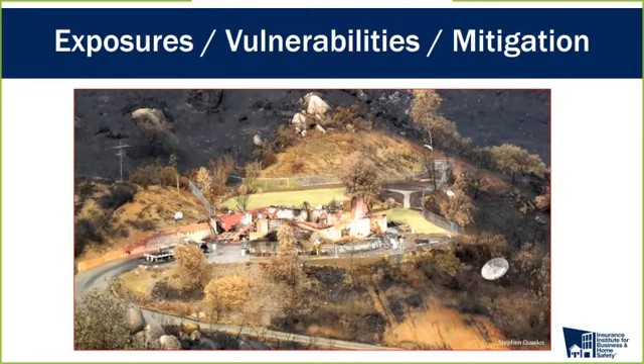Up until recently, our lab being one example, and other researchers, for example NIST, information for the built environment has been a little bit lacking. There's been a lot of information about defensible space and vegetation, not as much about the building. I think that's changing with an increased research effort in this area.

I'd like to spend a second talking about IBHS. For those of you that don't know, it is a member-based organization funded by the insurance industry. Our objective is to conduct scientific research to identify vulnerabilities and evaluate mitigation strategies for these vulnerabilities. We focus on natural hazards that have a wind component, so wind-driven rain, hail, and wildfire because of the ember exposure. Once we find things that work, we try to get them implemented in codes and standards, and we also have a pretty active communication effort to get this information to homeowners and others that can benefit from what we find out.

Most of our wildfire research is conducted at the IBHS Research Center in Richburg, South Carolina, about an hour south of Charlotte, North Carolina. As you can see, it's a large chamber, a wind tunnel facility. We can put full-size buildings in and subject them to wind-related events. We have some small lab capabilities for many of the hazards we investigate, but for wildfire, mostly we use this chamber. This is the inside of the chamber. In the left-hand picture you can see the array of fans. There are 105 fans that can blow winds of up to 130 miles per hour, roughly 58 meters per second. Each fan is roughly 1.7 meters in diameter.

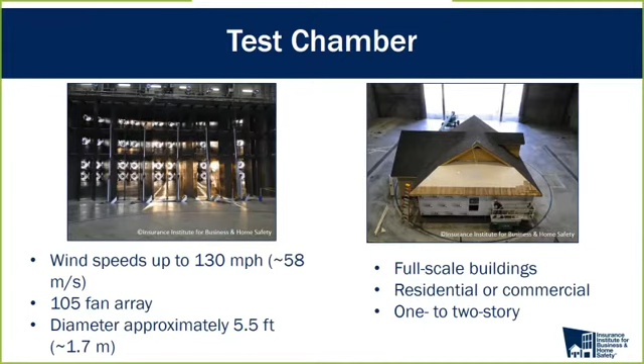So that's what those vertical steel ducts are. The right-hand side picture, you can see a building on a turntable. This turntable allows us to turn the building to evaluate the impact or effect of wind direction on whatever we happen to be investigating. It's a useful capability just because of what wind does around the building. We can put full-size buildings, residential, some small commercial, 1 or 2 stories. So that's our facility in a nutshell.

I wanted to move on and talk about wildfire exposures. Research and post-fire investigations have shown that ember ignitions are the major cause of building ignitions during wildland fires. It isn't the wildland fire flame front that actually results in ignition of buildings, it's ember-related things, what embers can do directly and indirectly, and I'll talk more about that in a second.

The left-hand picture is a good example of the importance of the ember. You see a burning building, this is from the Angora fire, Lake Tahoe area in 2007, California. You see a lot of green vegetation around this burning building, so the fire didn't burn to the building. Embers blew over the green vegetation, ignited some vulnerable part of the home, and ultimately resulted in the complete loss of the home.

The right-hand picture is the second generation ember generators working. This was during a vent study evaluating the effectiveness of vents, or the vulnerability of vents to ember entry. I think it's an impressive display of how these generators work. The burner part of the generator would be underneath those vertical ducts, in a 6 foot or so deep trench. So that's just an example of how we conduct some experiments.

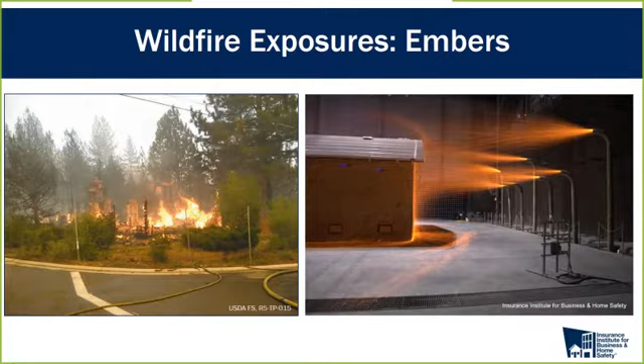So this is direct versus indirect. Direct ignition is when embers directly ignite a combustible material. On the left-hand picture, embers accumulating at the base of this combustible wood shingle wall ignited just from the ember accumulation, igniting directly.

Indirect examples are on the right-hand picture. Debris in the gutter, embers ignite the debris, and then that flame from the burning debris impinges on the edge of the roof. Similarly, on the ground where we have bark mulch, embers ignite the bark mulch, and you have a flaming exposure to the side of the building, whether it be the siding itself or the windows, as you see there's a window in this picture. So that's an example of indirect.

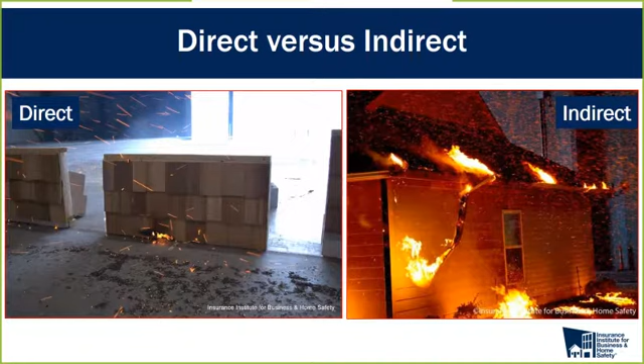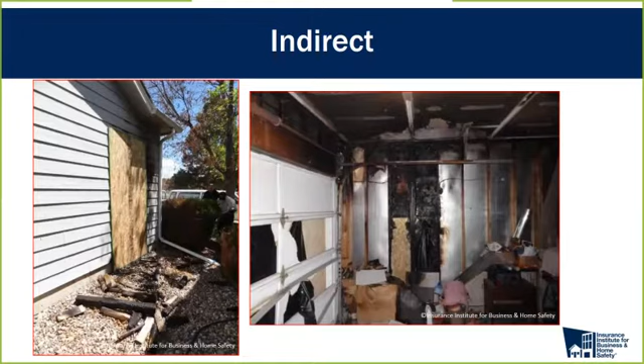Here's another example of indirect. This is rock mulch at the base of this particular wall, from the Waldo Canyon fire, 2012 in Colorado Springs. This rock mulch is a good detail, we think, but the homeowner had put a wood pile on top of the rock mulch. Embers ignited the wood pile, creating a flaming exposure to the siding, and you can see on the left-hand picture the kicked-away wood pile, likely by firefighters that showed up, and the inside of the garage showing damage in this case. So this house was only damaged. Had no one shown up, it would have likely been a different story.

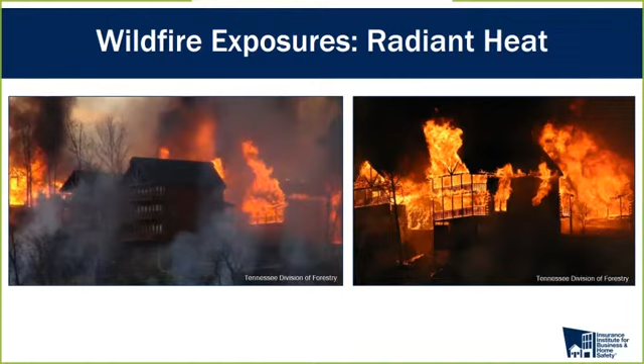So the other two exposures are radiant heat and flame contact. You'll notice that indirect often results in radiant heat and/or direct flame impingement exposure. This radiant heat example is from a fire in eastern Tennessee, not the recent Gatlinburg fire but the one before in the same county. Extended radiant heat from one burning building ignites another without direct flame contact. There was a window in the upper part of the left-hand picture where you see flames coming out. It's possible the glass was broken, but it was a big overhang, so it could have been ignition from heat trapping up in that area of the wood components of the building. The right-hand picture is just several minutes later - the same building that's just starting in the left-hand picture became fully involved and burned to the ground relatively quickly. It took about 15 minutes to go from the left-hand picture to the right-hand picture.

And then direct flame contact - in this case, fire burning up this draw reached the home you see burning. It was direct flame contact from this particular fire burning up the draw and impinging on the bottom of the wall of this home, then burning up and involving the decks, as you see here.

So the three major exposures are: ember, radiant heat, and direct flame contact. Indirect ember exposure results in radiant heat and/or direct flame contact.

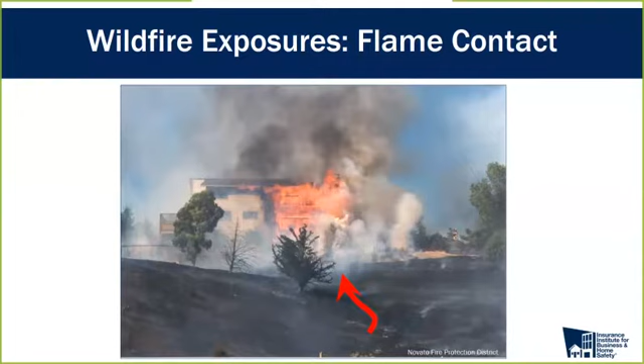So those are the typical Ember exposures from wildland fire, and then you have these other mechanisms that result in ignition of a home from the Ember.

So ultimately, when we have a lot of home losses in a wildfire, you get to a point where you have a number of home-to-home fire spread scenarios.

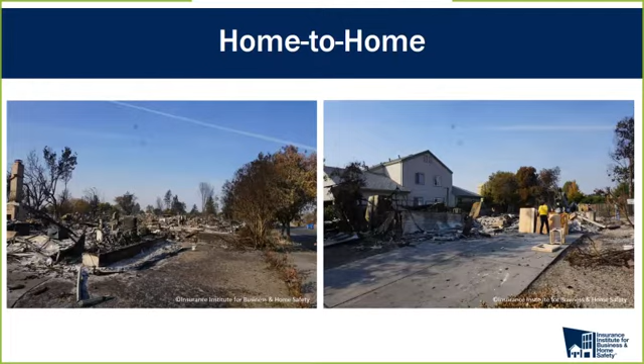The idea here is that no matter what the homeowner may do on the property, that home still has to resist an Ember exposure, because the homeowner or business owner really doesn't have enough control over enough space to bring the Ember exposure to a given building to zero. So that home always has to be able to resist an Ember exposure.

But with good defensible space, they can minimize the opportunity for direct flame contact or extended radiant heat exposure to the house, through selection, maintenance, and location of vegetation and other combustible materials like a wood pile or a tool shed. So it's a coupled approach, and we think that's the best way to minimize the opportunity for a home to ignite during a wildfire.

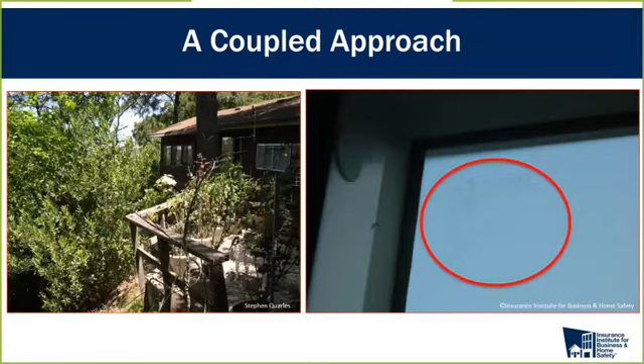As an organization, we are really interested in both new construction and existing construction. Most of us already live someplace, so the things we find out really need to be applicable to existing buildings. Building codes typically only address new construction, so we need a way to encourage homeowners to make changes to their house to make those existing buildings more resistant to wildfire. So we try to provide information on both ends.

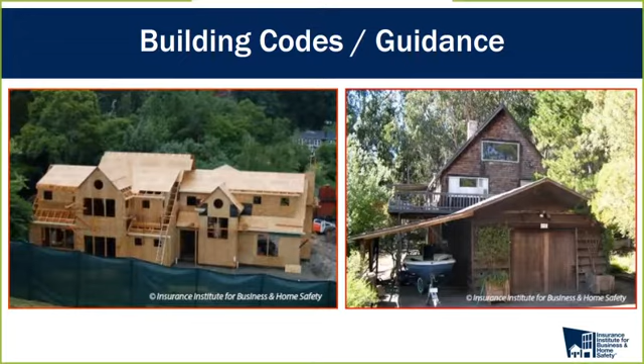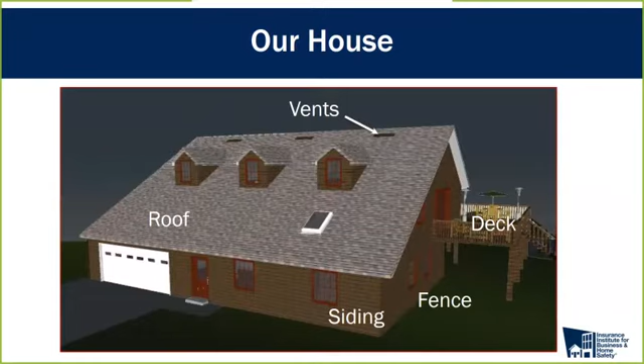We're going to walk through the vulnerability of buildings by talking about it by components: roof, siding, fence, deck, vents. These are sort of the main components. Before we do that, I'm just going to spend a second on defensible space, in particular this zone 1.

I think defensible space is sometimes called other things, but it really just applies to how and where you place vegetation, how you maintain it, the kind of vegetation you choose, and where you locate other combustible things. In Canada, this is referred to as priority zones, I think that's what the Fire Smart program calls it. In the United States, defensible space is a common term.

Other terms are used too. Typically you have just two zones from the house out 30 feet, or roughly 9 or 10 meters, and then from that point out to roughly 30 meters out.

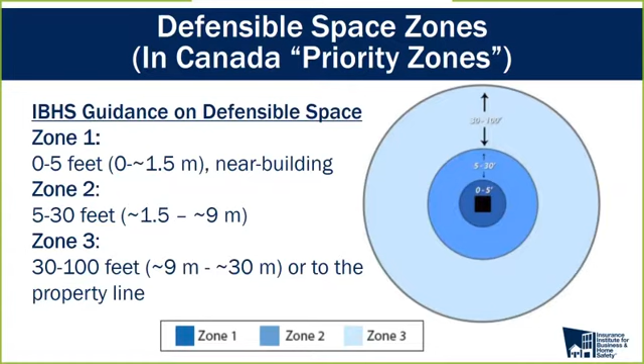What we have done, and other education organizations have done, is incorporate a separate zone really close to the building, within a meter or two of the house. We call that the non-combustible or low combustible zone. That's a really important part because it minimizes the opportunity for embers to ignite things close to the house that would definitely result in radiant heat exposure or direct flame contact to the building. So this non-combustible zone is one really critical part of this ember-resistant ignition component for a building.

The same kind of zone that would be within a meter or two of the house, you extend it to include the entire footprint of the deck. What we want to avoid under a deck is the storage of a lot of combustible materials. It's kind of hard for any deck to resist burning your own private lumber yard underneath it. It's difficult for any deck to resist that kind of exposure.

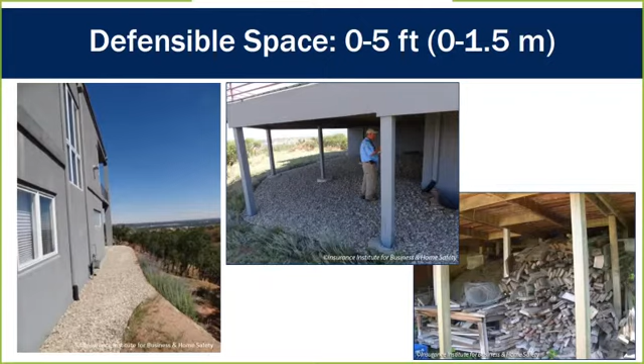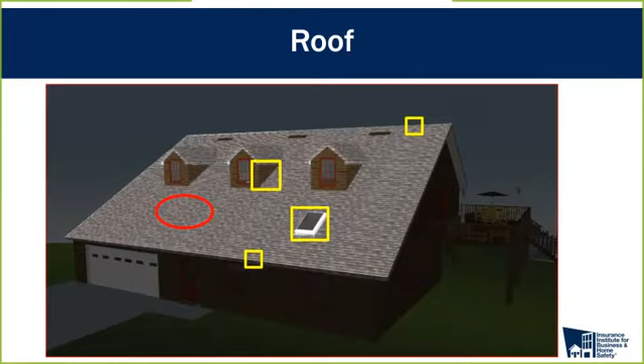There are other components to the fire rating that include flame spread and flame contact kind of exposures, and whether or not the burning roof covering generates embers or firebrands. You have to pass all of them to become a Class A, for example.

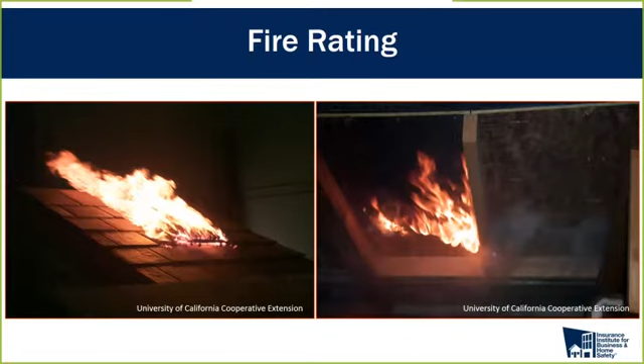This is just showing the burn through or fire resistance part. This burning brand is a three-layer construction, kind of sandwich, where small squares of wood are nailed together, and for Class A it's 12 inches by 12 inches. Anyway, so that's the field of the roof issue.

But the edge of roof issues can be more vulnerable to embers than the field of the roof. So that's why we need to really address these when talking about wildfire resistant strategies for homes and buildings.

So we see here a tile kind of roof. The left-hand picture is a flat tile, but at the hips you notice there are openings during the day-to-day life of the home. Debris can blow into this gap and accumulate underneath this non-combustible roof covering. During wildfires, embers can follow right into the same location, ignite those fine fuels, the pine needles or leaf litter that gets blown in there, and ignite the home that way.

So embers ignite leaf litter or fine fuels, which then causes flaming exposure to the roofing felt, then to the other structural components of the home. The right-hand picture shows a barrel tile roof. Similarly, you can see in the open ends on the right-hand part of that picture, birds can crawl up in there and build nests. Rodents can do the same. Debris can do the same. During wildfires, embers follow, igniting fine fuels, and then those fine fuels ignite the more structural components. So in all of these, the strategy is to block these openings.

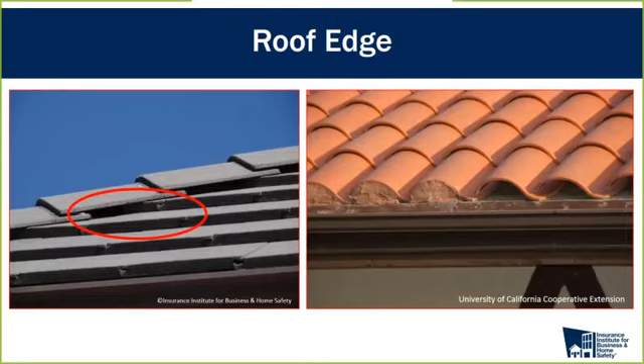But the same kind of vulnerability occurs at the hip, as you see on the left-hand picture here. These are critical things that need to be addressed to improve the resistance of a home to wildfire.

Here's another example. This is what I lump into complex roof issues, and the two pictures show a similar thing, and that is roof to wall conditions. The left-hand side is a split level house. The right-hand side just shows a dormer with siding. These are both Class A roof coverings, asphalt comp roof coverings, which are Class A.

And you see in each one there was debris on the roof. This debris will be readily ignited by an ember exposure, and the Class A roof covering can handle this kind of exposure. In this case, it would damage the roof, but it wouldn't burn through into the occupied space.

But the vulnerability for this roof is the siding. Can the siding provide the same kind of protection? The left-hand picture shows a cedar shingle siding product. I would argue likely not. So the vulnerability of the home on the left isn't the roof per se, but it's the siding that could look like a roof vulnerability.

So we need to make sure that the siding protects in these situations, that it provides comparable protection to the roof as a Class A roof does. Replacing the siding locally in this area, and being really vigilant about removing debris from the roof, are options. The most surefire one is to replace siding locally in this area.

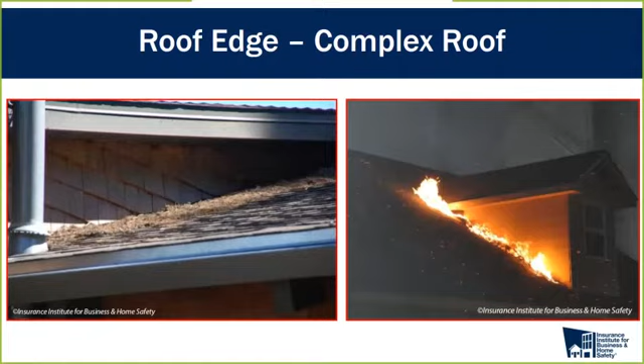So gutters, we saw this left-hand picture a little bit earlier. This is debris in the gutter ignited by embers. The left-hand part of that picture shows a vinyl gutter. That vinyl gutter will detach if the debris is ignited by embers and fall to the ground, and it will become a what's-on-the-ground problem.

The gutter on the right is a metal gutter. It'll stay put, and so it's an edge of the roof issue, but we need to make sure that edge of roof can handle that exposure. So removing debris from the gutter in a routine way is one way to minimize that occurrence. And then another way to help with this is to provide a metal drip edge at that roof edge. I'll show you a picture of that in a minute.

You also see this burning debris on the ground, and we'll talk about that a little bit more when we talk about windows.

So one option is a gutter cover device, and that tends to minimize the accumulation of debris in the gutter itself, as we see in the right-hand picture. But depending on the gutter cover device, sometimes it just forces the accumulation of material someplace else. In this case, it's on top of the gutter cover. You'll also notice, if you walk around and look, that it can also force the accumulation of debris on the roof covering.

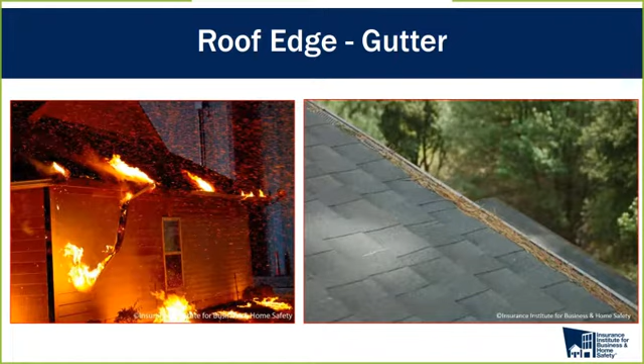So here's just a continuation of the gutter story. Let's go to the right-hand picture first. This is an integrated gutter with a drip edge, so the gutter slips in underneath the roof covering, and then there's a vertical leg down which bends around and becomes the gutter. If your gutter doesn't have this, you can buy pretty easily and inexpensively an angle flashing that you would just slip under the roof, letting that vertical leg hang down and go over top of the vertical leg of the gutter where it attaches to the fascia board.

This provides protection of the wood components, the roof sheathing and the typically wooden fascia board. So it protects that should debris ignite. An additional benefit is that it can reduce ember entry and accumulation at that joint.

The left-hand picture is from an early experiment that we did, and you can see the red circle is circling a glowing ember that is entering at the gap between the roof sheathing and the fascia board. So with that angle flashing in front of it, that ember doesn't have a way to come in.

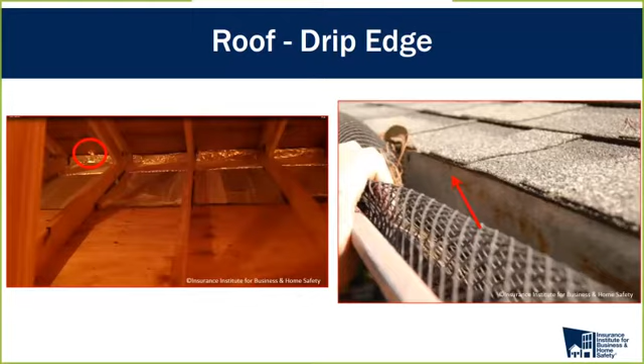Skylights used to be pretty common in California, but they're becoming less common because of energy code regulations. There's a couple kinds of materials commonly used for skylights where they do occur. The flat skylights, shown in the left-hand picture, typically are tempered glass or laminated glass, often with 2 layers to provide additional protection to the occupant. The one on the right is a plastic dome type.

Most guidance tells you to avoid the plastic dome type, but I think we need to incorporate additional information regarding the slope of the roof. These 2 pictures depict relatively flat or low slope roofs, and you'll notice debris doesn't really accumulate on the domed skylight at all - there's a little bit, but not nearly as much as on a flat one. So the flat skylight with a lot of debris accumulation would be a flame impingement risk to the glass, and whether the glass can resist that is really a function of the type of glass.

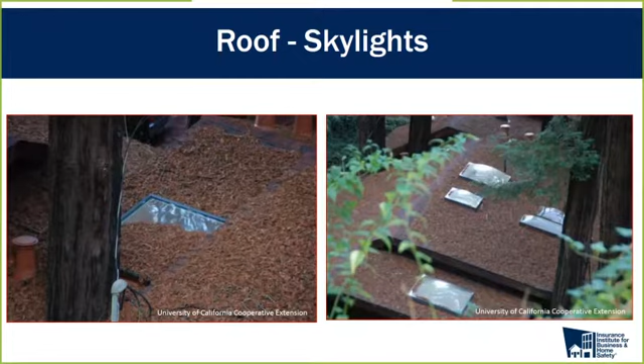So removing debris from the roof is a good idea, but for flat roofs, since they all have metal flashing surrounding the skylight to roof intersection, you can argue that domed is better for flat roofs. But the steeper the roof, the more it acts like a wall, and then you really need to consider what that wall is seeing in terms of vegetation outboard. You want to minimize the opportunity for extended radiant heat for that wall to see. So make sure your vegetation management is good in areas where you have a steeper roof.

So let's talk a little bit about vents now. There's a number of vents that can be on your home if you have a vented attic space. Typically you'll have one set of vents in the under-eave area - these are nominally inlet vents - and other vents on the roof or at the gable end that would be nominally outlet vents. If you're built on a crawl space, you'll also have foundation or crawl space vents. There are also vents on the vertical wall for rooms with combustion air equipment like a hot water heater or furnace, which need makeup air, so those are typically screened openings.

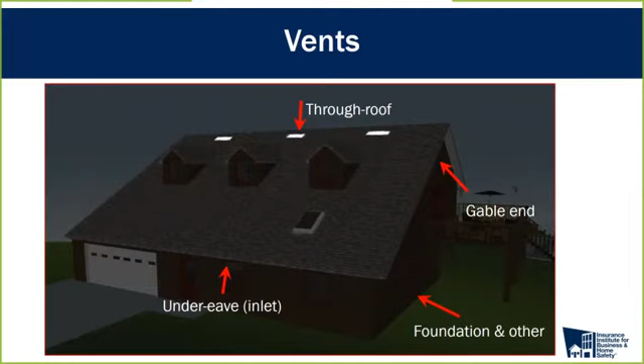These are all places where embers can enter. There's been a number of post-fire reports where ember entry through vents ignited combustible materials on the inside of the house, and the house burned from the inside out just from this kind of exposure. So we recently completed an experiment that evaluated the vulnerability of vents to ember entry. I'll be talking about some of that today. That report is available online, and I'll show you the website address in a bit.

Under-eave construction has a couple of different basic designs. On the left is what I call soffited eave, where there's a horizontal member that extends from the roof edge back to the exterior wall - a pretty wide overhang, really good for wind and rain situations, but there's that strip vent circled in red. On the right is what I call open eave construction, where if you look up into the under-eave area you can see roof rafters. The venting for the attic spaces is in the blocking between these roof rafters.

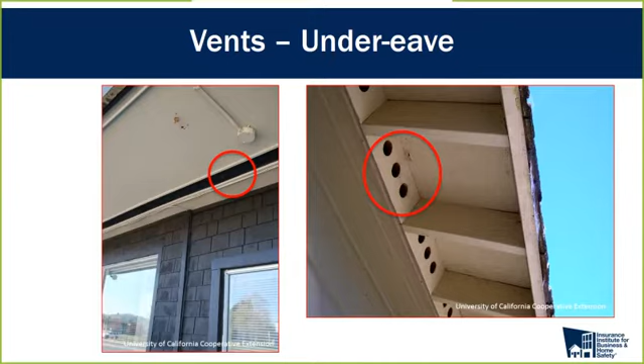We did a wind-driven rain study recently and looked at the location of that vent. We found that close to the building is actually a really bad location for a strip vent. It should be located close to the roof edge to minimize ember entry into the area over the occupied space.

Every vent that the wind blows against is an inlet vent. The embers will want to enter that vent. And on the leeward side of the house, that vent, no matter what it nominally is, it's an outlet vent. So in this case, wind blowing against the gable end vent, it is an inlet vent. The embers enter readily.

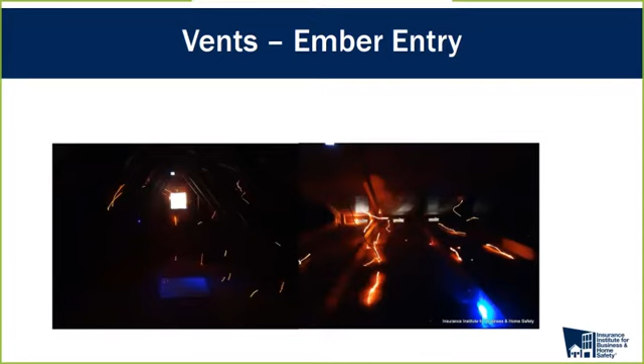So one of the ways to minimize the number and size, in particular size of embers, is to make sure you have finer mesh screen. Some studies I was involved with earlier have clearly shown that embers entering through 6mm mesh vents, or what we'd call quarter-inch mesh vents, can readily ignite fine fuels. Less likely the finer the mesh - so 3mm, the eighth-inch - the size of ember that can enter is lower. The embers will land on that screen on the outside, and they'll just burn down until they can fit through the available area, and then they'll come into the occupied or enclosed space.

We've decided on this 3mm mesh as a good size. You can use even 1/16 of an inch mesh, so roughly a millimeter and a half. We've just found that really plugs up pretty readily with debris, and so it minimizes the opportunity for the vent to do its moisture management function when you do that. So the 3mm seems to be a compromise in terms of limiting the size and to some extent the number of embers that enter, more so than the 6mm vent.

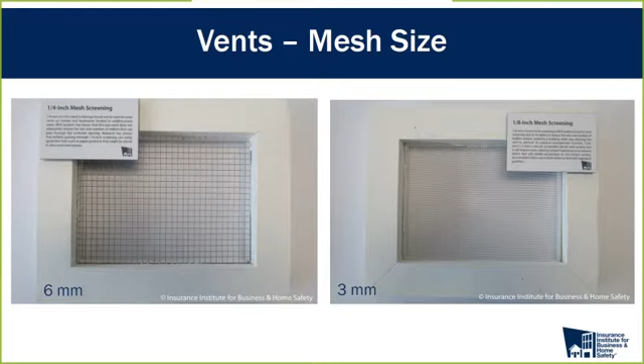So the 6mm vent we don't recommend. 3mm we think is good. 1.5 is better - it just, as a homeowner, you need to be ready to do a little bit more maintenance to make sure that the debris is removed from the vent on a regular basis.

In California, because of the way the building code is written, there's language that says vents need to resist the entry of embers and flame, and that has resulted in the development of a standard test method to evaluate the resistance to entry of embers and flames, and it also has resulted in a number of vents that are commercially available.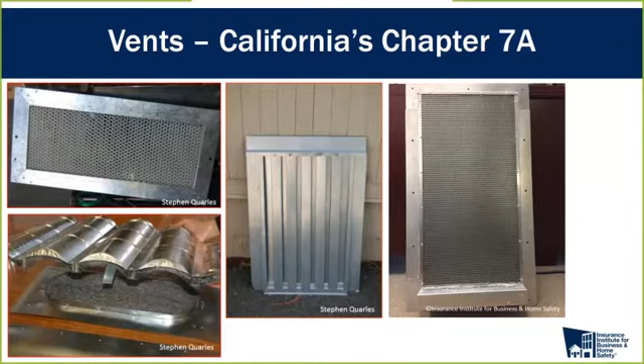The lower left uses a steel wool kind of design to capture embers on their way in so they can't get through. The middle vent uses a baffle design, and the far right vent also uses kind of a steel wool mesh to minimize entry. So these are available in California and not as readily available elsewhere. They're more expensive than screening, than just mesh, but the mesh, as I said, won't do anything for flame impingement, and these do have to meet a flame impingement component of this test method.

We looked at ridge vents. This is a ridge vent, and this one is rated to resist the entry of wind-driven rain. We found it was also quite good at resisting the entry of embers. The functional part of this is that external baffle you see on the left-hand picture. We cut that external baffle off just as an experimental design thing, and that's what you see on the right-hand picture. Definitely ember entry was far easier when that external baffle was removed.

In this case, there was actually a wind dependency, so at higher wind speeds embers could just traverse over from one side of the ridge vent to the other and go out. At lower wind speeds, the ember would lose energy and just drop right into the attic space below the ridge vent.

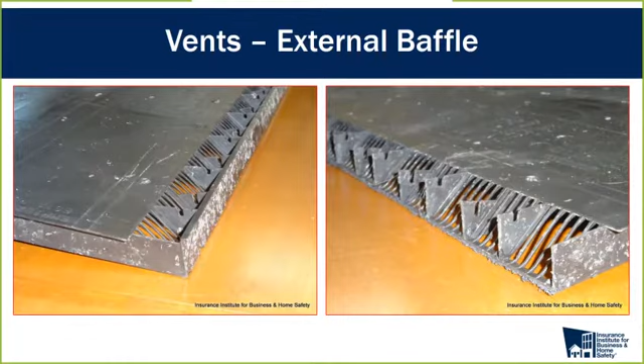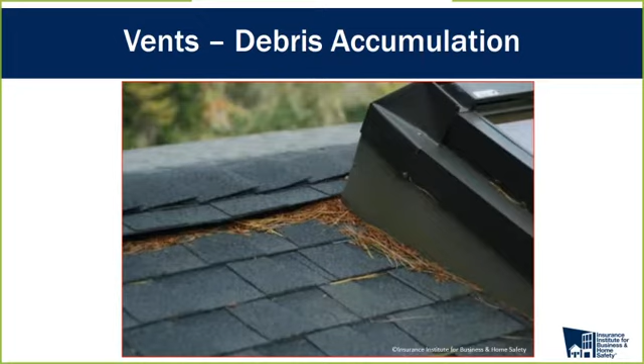So definitely, the external baffle is a good feature. The problem is that typically ridge vents are plastic, so you really need to avoid what you see in this picture, the accumulation of debris against the ridge vent. Embers will ignite that debris, providing a flaming exposure to that plastic ridge vent, which could be the vulnerability of this particular home.

There are other kinds of vents. This is a dryer vent, but just has mesh. We recommend more of a right-hand side exhaust vent, so that when the air is blowing against it, the flapper stays closed, and the exhaust air from the dryer, when it's operating, will allow the hot air to exit. There's a louver kind of vent for this application that does a similar thing.

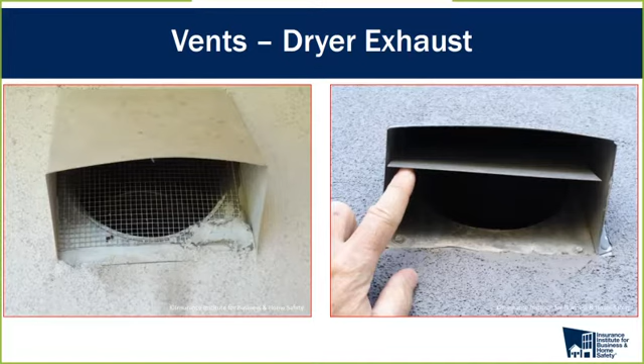Let's talk a little bit about exterior walls now. Siding is vulnerable if it ignites by two mechanisms. One, if you have vertical flame spread up the wall, as you see on the left-hand side. The other vulnerability would be if it burns through at a lap joint into the stud cavity and then into the house that way. Both of these can be vulnerable, even if the flame penetration doesn't occur. On the left-hand picture, vertical flame spread up the wall will impinge on other things on the way, like windows and under-eave areas.

So really avoiding ignition of the siding is the best way to go. If you have combustible siding, then the non-combustible zone in front of that siding becomes really important. And this vertical non-combustible zone, from the ground to the start of the siding, is also equally important, so that the accumulation of embers at that wall-to-ground interface is against non-combustible things.

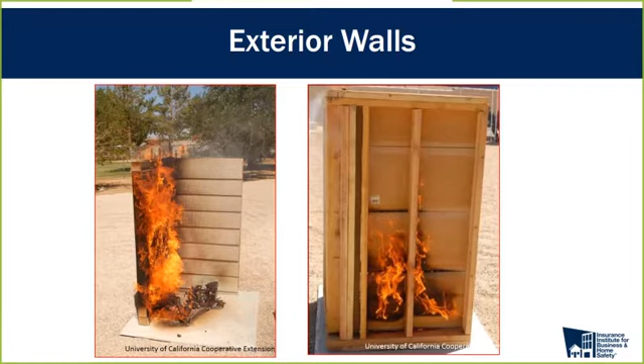So here we see the same story. Ignition of siding, as in the left-hand picture with the red circle, ignited siding with no clearance. The right-hand picture is 6 inches of non-combustible material. Nothing happened there. Nothing actually happened even with 2 inches. But 6 inches seems to be a good conservative number for minimizing the opportunity for ember ignition via accumulation at the base of the wall.

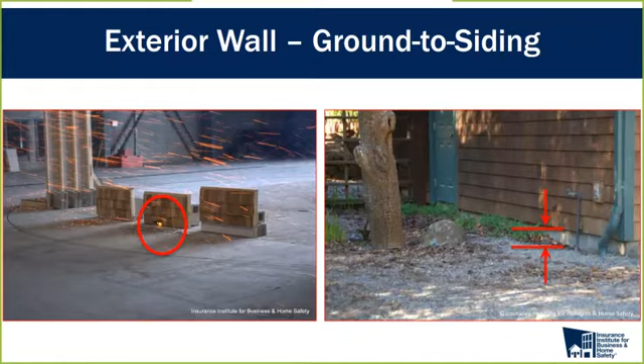So in addition to this horizontal non-combustible zone, this zero to 1.5 meters say, we like also to see, as in the right-hand picture, another vertical zone that also has non-combustible material, so that ember accumulation is non-combustible against non-combustible. This makes ember accumulation be for naught in terms of igniting things.

This is just to follow on with some more additional information. Here on the left-hand picture we have non-combustible siding, but bark mulch going all the way up to it. Embers, as we have seen, will readily ignite that bark mulch and will burn to the home in this case, either because wind is blowing that way or the backing fire will get to the home.

So you may think that you have non-combustible siding and you'll be okay, but the right-hand picture really shows that you have to consider the assembly of the wall. The wood-based sheathing product hangs out over that stem wall, so flames would, in this particular situation, impinge on this combustible material. Regardless, even though you have non-combustible siding, you still have combustible materials in the assembly that would be vulnerable to this kind of situation.

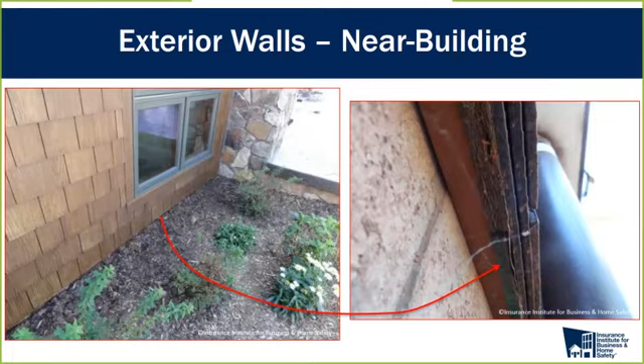So even though you may have non-combustible siding, this non-combustible zone, both horizontally and vertically, is really important from an ember ignition resistance perspective.

What we found was that these kinds of coatings in exterior applications don't really weather well. So there are a number of other things you can do besides apply a coating, and we're suggesting those be done, principally these non-combustible zones that we just talked about.

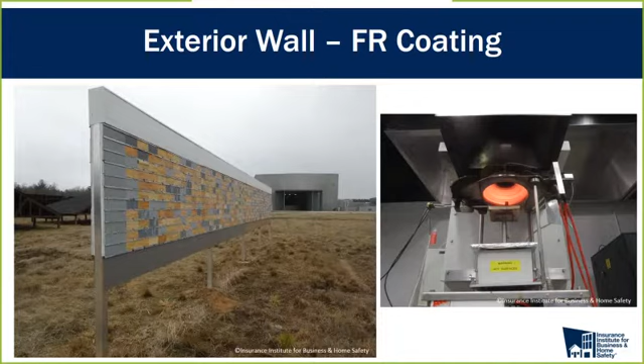Once formulations of paints have improved so that they would weather better, then this might be an option, and arguably it is an inexpensive option compared to replacing siding everywhere. This would be particularly useful if the home-to-home spacing in your neighborhood is small. Then replacing siding or a coating would be an effective way, but as long as they're not weathering well, we don't think this is a viable option at this point.

Another kind of coating that is sometimes suggested would be a gel coating. This is something that would be applied just prior to evacuating, for example. We've done some evaluation of this, and we're doing a little bit more this year, again, with the University of North Carolina at Charlotte. I think you just need to be really careful about how it's applied, or else it may not work well for you.

This shows the vulnerability of that coating: missing that little part of the underside of the drip edge, shown in the left-hand picture in the red circle, resulted in failure of the wall, burning through into the stud cavity. The gel-coated wall worked better than the uncoated wall you see on the right, but regardless, you still had failure at the base of the wall. Fire would have burned into the stud cavity. The result would have been similar.

I think this is a particular problem with homeowner use, because likely this will be the very first time they've used the product. It is used by firefighters, more professional firefighters, who are more skilled at application. So I think the effectiveness would really depend on that also.

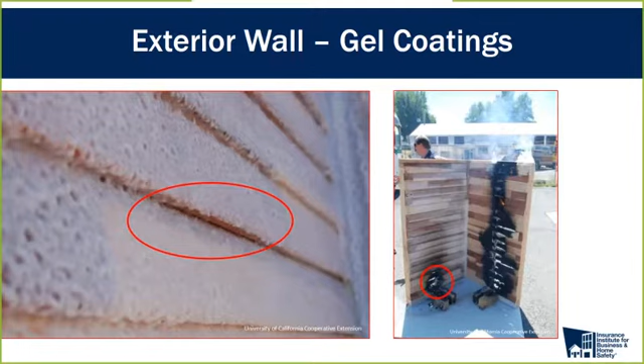We talk about windows. Windows are vulnerable if the glass breaks, and then flames and/or embers can enter, or if the frame ignites and burns through. The left-hand picture shows glass breakage. The right-hand picture shows frame failure.

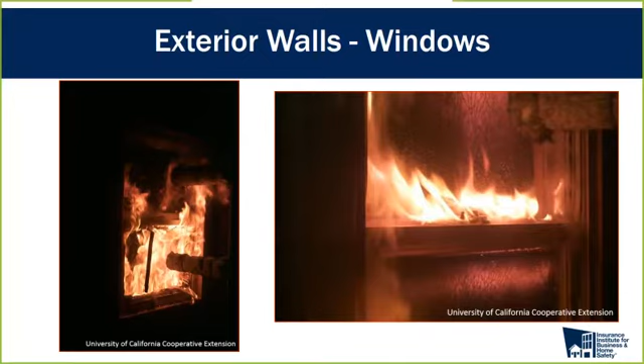Research that we did here at the University of California, and also at NIST, has looked at window performance, as has research done in Australia. The results indicate that glass is the most vulnerable part of the window. So dual pane tempered glass is a good way to go for wildfire-prone areas, and you can be somewhat indifferent to frame type. If you have vinyl windows with a single or double hung design, you want to make sure that middle part, shown in the right-hand picture, has a metal reinforcement member, making it less likely to deform and have the window fall out.

That's the only exception to indifference to frame. Also, the operable part should be screened. The left-hand picture shows embers accumulating on the screen. This is a combustible screen, but it did a good job of keeping embers out of the occupied space until flames touched it. Once flames touched it, the right-hand picture shows the screen failed, flames entered, embers entered, and it ceased to do its job on all fronts. So screens can be really effective in reducing radiant heat exposure to the glass, and they do a good job of keeping embers out.

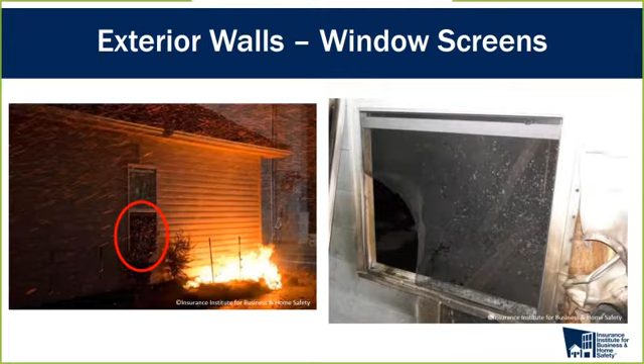We always recommend closing windows when wildfire threatens, just for ember entry performance. But screens are useful for situations where you may not be home to close the window, for example. You just want to make sure flames can't touch them, and this is another reason for having a non-combustible zone right next to the house.

We're getting close to the end of the prepared talks. I want to talk a little bit about decks and fences, but decks first. This is an attached deck - ember exposure to the top, or flames burning up underneath, are two ways that decks are vulnerable.

If ignited, the deck can then break glass on some access doors - in this case, break the glass in that sliding door - or ignite combustible siding. This is a T1-11 siding product, a wood-based siding product.

I think if all decks did was burn and fall off the building, we'd be less concerned. But since they are attached to the building and can provide a pathway of fire to the home or building, we're interested in the performance of decking. This is one reason for careful management of vegetation, so that flames cannot get to the underside of the deck.

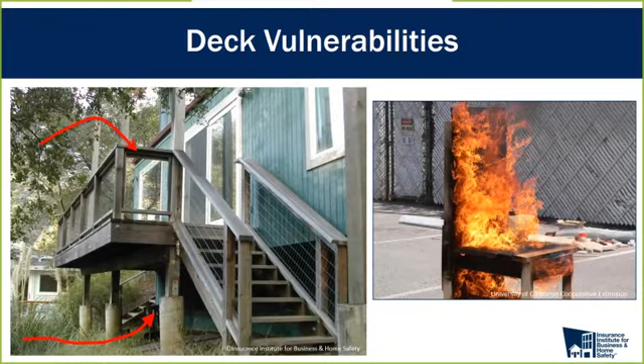Really the question then is how well do deck boards resist the exposure of embers? Because no matter what you have done in terms of defensible space, your deck will see an ember exposure when wildfire threatens the house or area. The right-hand picture is just an under-deck fire - a demonstration I did a number of years ago - but you see the under-deck ignition of the deck and then ignition of combustible siding. It was a pretty dramatic fire on this little teeny display sample here.

So there are ways that decks attached to the house can make that part vulnerable. We're looking at this particular deck-to-wall attachment. You have a gap between the deck board next to the house and the house itself. Debris accumulates there, embers ignite that debris, and you have a flaming exposure, in this case, to this shingle-sided house. So removing debris from that area is really important.

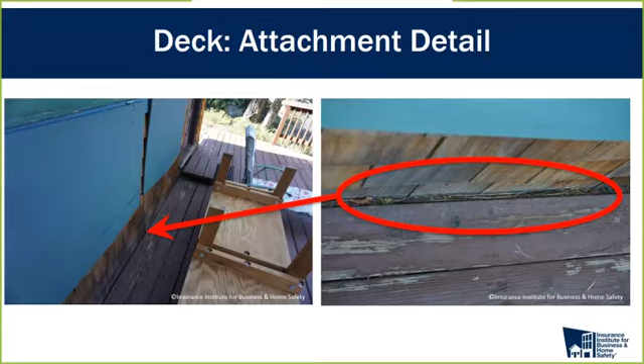We can use a metal flashing detail to have ember accumulation be against a metal object as opposed to the wood siding. You have to be careful with this approach, because you don't want water to get behind that metal flashing and cause decay or rot in that wood siding product. So the deck-to-wall attachment is something we need to look at and mitigate where necessary.

Now these are pictures from a study we did investigating the ember ignition potential of decks. You'll notice on the left-hand picture there's a rather large deck, but the test deck part is just a small bit next to that wall coming out from the building. You can sort of see the deck part.

We did this because embers will naturally flow away from the building because of what the airflow does. So the embers will try to accumulate at the base of the wall, at the deck of the wall, but then they'll flow out unless something stops them. They'll naturally stop where this deck is placed, and that's why we placed it there.

So you'll notice in the right-hand picture that we do have flaming ignition occurring. Flaming ignition, where it occurred, consistently occurred at the gap between deck boards where the support joists were located. So the embers landed in that gap and either passed all the way through because there wasn't a joist there, or landed on top of the joist, and that would be the ignition location.

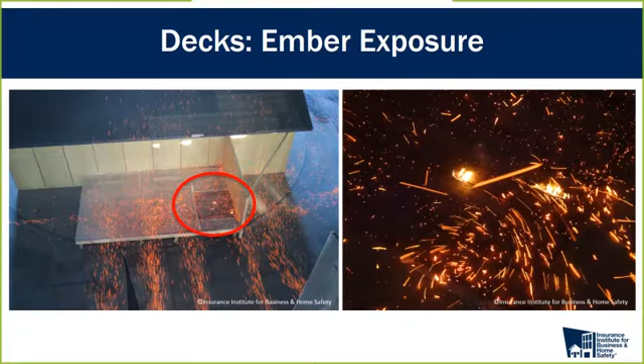For our experiment, we incorporated wood decking products, fire retardant wood decking products, and some wood plastic composite products. These products complied with a California test or didn't comply—we picked ones that went both ways. The California test is a flame impingement exposure to the underside of the deck.

We were interested in knowing whether, if the deck had complied in California, it provided sufficient information regarding the ignition potential from an ember exposure. That report will be available pretty soon—we're just finishing up one little bit, and then it will be put on our website. If you're interested in that aspect, it'll be there within a few weeks or earlier.

We basically saw that only lower density woods were really vulnerable to ember ignition right away. The higher density hardwoods performed similar to wood plastic composites. So it seems like higher density materials resisted ignition more than the lower density woods.

The fire retardant treated wood also was not vulnerable to an ember exposure. Our ember exposure was up to an hour, so we feel that was a pretty severe exposure that we were monitoring for ignition. The lower density softwood ignited within 12 to 15 minutes. Then in one case, one of the two samples ignited—so it was sort of no one time and yes another time—and that took close to 50 minutes of steady ember exposure before ignition occurred.

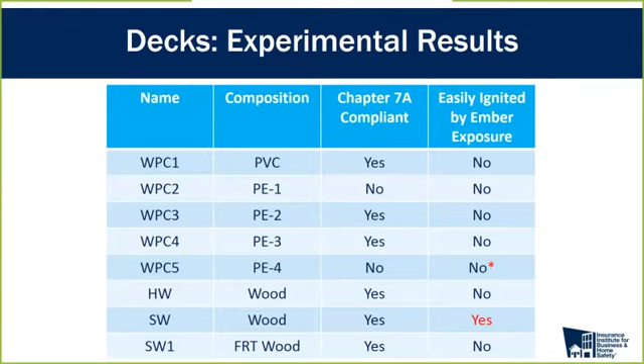This other thing we observed—I guess if you thought about it, maybe not so surprising, but it was surprising when you were underneath the deck and had embers falling on you—was that if they didn't stop at the joist, they just came right on through and landed on the ground.

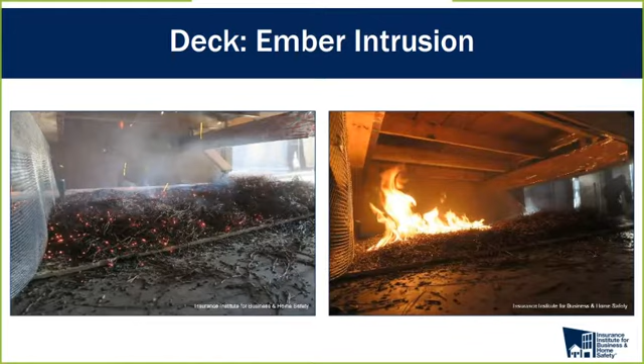So we put some debris on the ground underneath the deck, and sure enough, we were able to ignite that debris. This reinforces our guidance in terms of wanting to have a non-combustible zone that extends under the entire footprint of the deck, because embers that land on that deck are going to fall straight through and land on whatever's underneath it. So better it be something non-combustible.

This is a short diversion into what we're doing right now in the lab. Later today we'll do another experiment, but this is also a visual for what I was just describing. These are embers falling at the house. They hit the side of the house, go down to the base, and then outward away from the house. That's just what wind does, and embers make it easy to see what the wind is doing.

You'll see two red circles. One is right at the house-to-floor junction, and you can see the bright area — those are embers accumulating at the base of the wall, so that needs to be protected. If you have a smooth surface, like a deck, unless there's furniture or something on it, embers will flow away from the deck until they get some distance, which is a function of the height of the wall. Then they stop, creating a dead zone where accumulation would naturally occur — that's where we placed our deck.

So our next study assumes the deck ignites. Given this reverse flow of air from the wall outward, what does it take for a fire that ignites outboard of the wall to burn back to the wall? If we fix what's going on at the roof and the wall-to-ground intersection, then should it ignite outboard of that, what's the likelihood of the fire burning to the house? Our experiments over the next few weeks are designed to address that question.

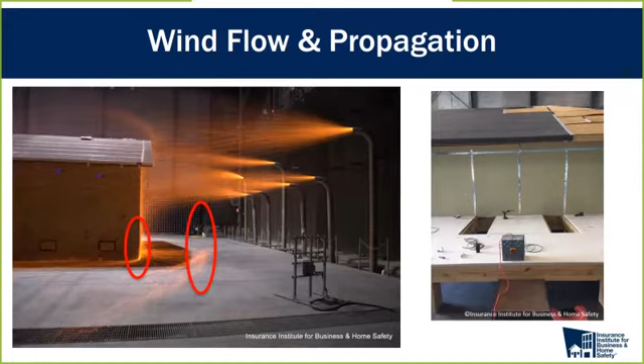Okay, the last topic is fences. We worry about fences because if they ignite, they can serve as a wick and fire can burn to the house. The left-hand picture shows the mechanism of fire spread to the house from a fence, and the right-hand picture shows a lattice fence burning.

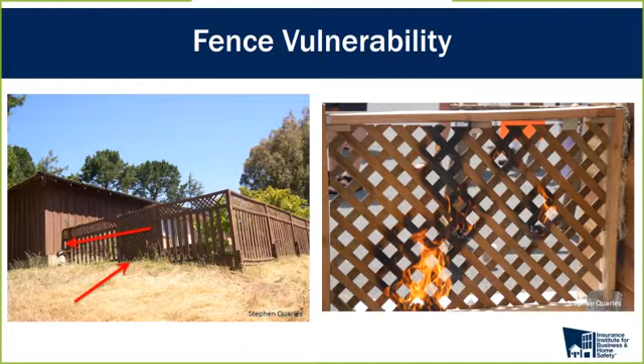We did this in collaboration with the United States NIST, the National Institute of Standards and Technology. We ran a collaborative study in our lab where we wanted to understand the ember ignition potential of common combustible fencing, and the likelihood of flame spread to a test building or house.

We see two things going on here. The left-hand picture shows what we call the privacy fence, where the planks are all on one side of the horizontal support planks. The right-hand side shows the good neighbor fence, where planks alternate so that if I'm a good neighbor, I take care of my side of the fence, and you, my neighbor, take care of the other side in terms of maintenance.

We also incorporated bark mulch at the base of some fencing to mimic combustible material that could be underneath a fence. Bark mulch represents sort of the worst case of all things combustible — typically it would be dried grass, for example. In the left-hand picture, you can see we also did experiments without that base combustible material.

Ignition occurred most likely, from strictly an ember ignition perspective, on the privacy fence. It provided the most consistent vertical-to-horizontal places where platforms could form and embers could accumulate. You see embers accumulated and resulted in flaming ignition where the post and horizontal planks met.

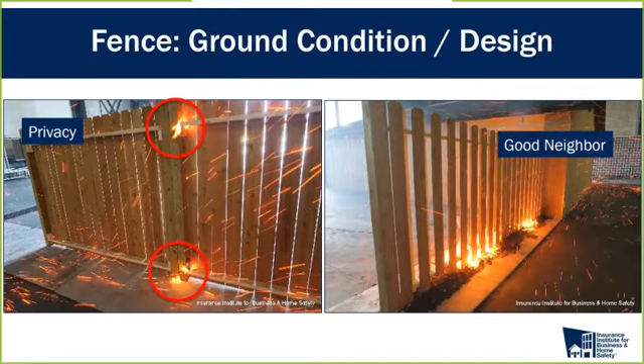Often with the fence itself, the members would just burn apart, and once they got far enough apart, flaming would stop and radiant heat couldn't bridge the gap because the distance between members was too great. So this is evidence to be vigilant about keeping debris from accumulating at the base of the fence, which minimizes the opportunity for flame spread to occur and reach your home.

Here we see an example of this flame spread part of the study. In this lattice fence example, the fire just couldn't get to the house because the fence detached from itself, and the lattice fence components are far enough apart that they can't sustain flaming ignition.

NIST did a pretty interesting study where they put lattice on both sides of the fence, and that was a far different picture. I don't really see in the field two-sided lattice type fences unless maybe it's in a garden and you want to have creeping vegetation growth on it, like a pea. But that design should not be used anywhere close to a house because the result is just different. So one-sided lattice is one kind of performance, but two-sided lattice is just a bad design.

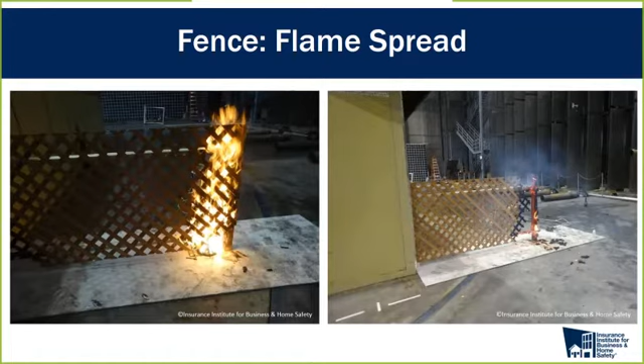Our guidance has always been, don't put a combustible fence next to your house, and we are not changing that guidance. Having a non-combustible fencing component next to your house is the way to go. It seems fairly conservative, but that's perfectly good. So we're not changing our guidance a whit.

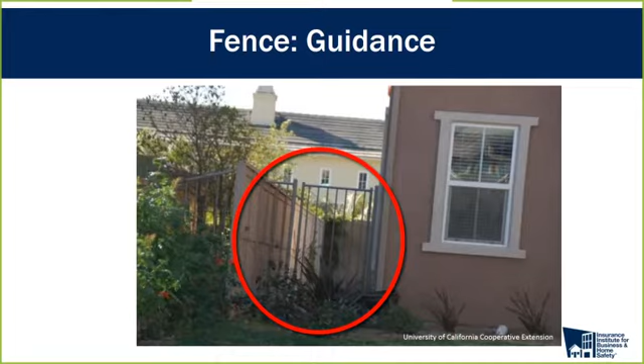Keep debris away from your fence, and use these non-combustible components within 5 or so feet of the house. Sometimes fence sections are an 8-foot length, so that 8-foot length would also be a good dimension to be non-combustible where it attaches to a house or building.

Just want to summarize here. We talked a lot about exposures: ember, direct flame contact, radiant heat, and the difference between direct ember ignition and indirect ember ignition. Direct ember ignition is when embers ignite a combustible thing by themselves. Indirect ember ignition is when embers ignite a combustible material, which then provides a flaming exposure or extended radiant heat exposure to the building.

We talked about the coupled approach for building survival. These include vegetation management and location of combustibles on the property, typically lumped into a category called defensible space, and then the importance of materials and design features in minimizing ember ignition of these components.

If it's a wildland fire to home ignition scenario, there's a lot of things you can do in terms of small details to minimize ember accumulation at the house or building, or embers getting into the home, either into an attic space or another area where a vent is present. These things I think work well.

If it's more home-to-home spacing, once a home or two ignites, then home-to-home fire spread becomes a much more common way of fire spread, and flame contact scenarios and extended radiant heat scenarios that lead to ignition are more common. Some of the things that might work for wildland fire to home cease to work as well for home to home.

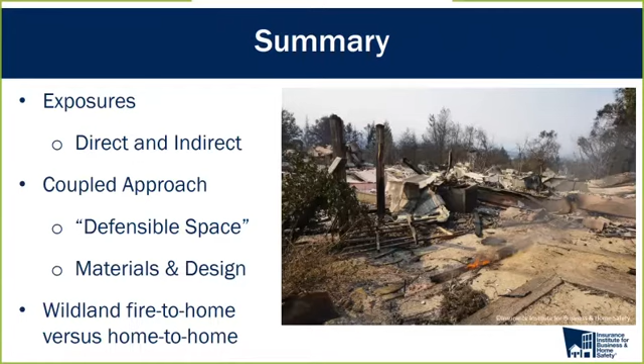Hi Steve, it's Dan here. Thanks very much for the comprehensive presentation. I'm sure lots of people on the line are thinking about their own houses as you're going through all the very specific vulnerabilities. There's a question here related to whether or not this presentation will be posted.